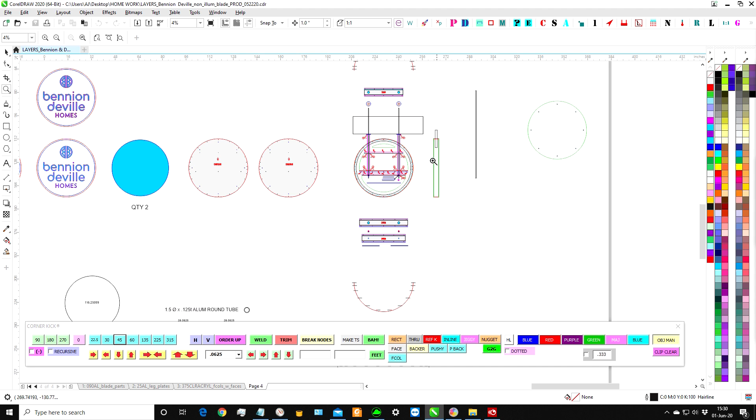All right, this one's for how to put together the blade sign for Bennion Deville. It's going to be kind of big, but it's kind of our usual. You'll have your notched top and bottom. You'll go ahead and fold this up here. That'll be your seam, so you can weld that.

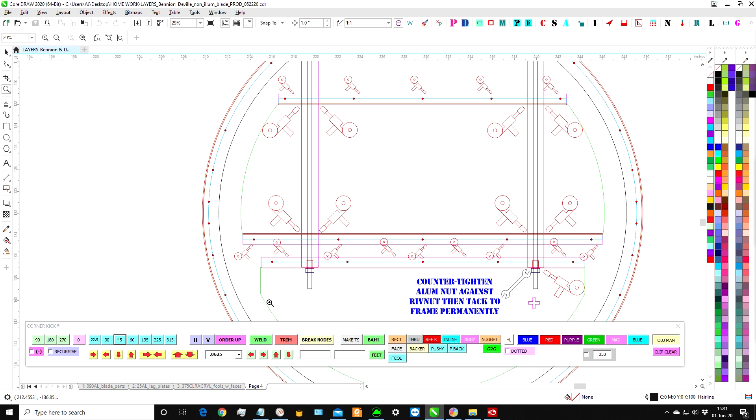You have a side A and a side B. So the jig will be side A is over here, side B is on this side. And you'll go ahead and just put it together that way. Put the seam, weld it together. Both sides will face forward, so both A's will be on this side, both B's will be on this side.

You go ahead and put these guys in, so you'll have the green parts are jig. You go ahead and click those on and just weld these bars in, and those will give you holes in order to put the legs through. So you go ahead and you have the top piece here, tack it all along there. Put this bottom piece in there, tack it all along there.

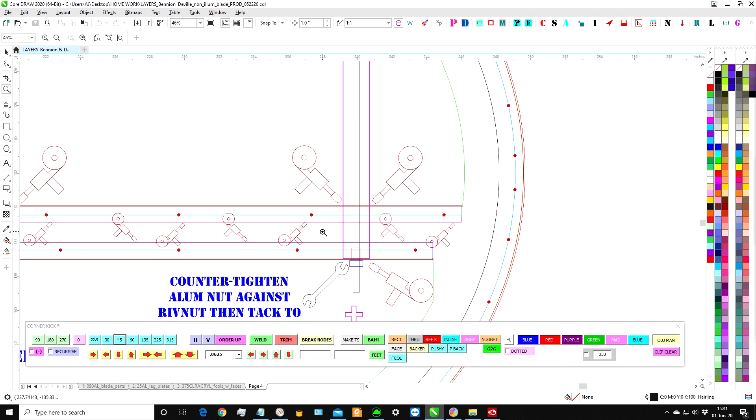I encourage you to put the riv nuts in first. You're going to have 3/8 riv nuts right here. That's the bottom piece. Your bottom top piece will be bigger. So once you have all of this welded together, put the outer perimeter on, weld that, weld all these. Then go ahead and slide your tubes in your legs.

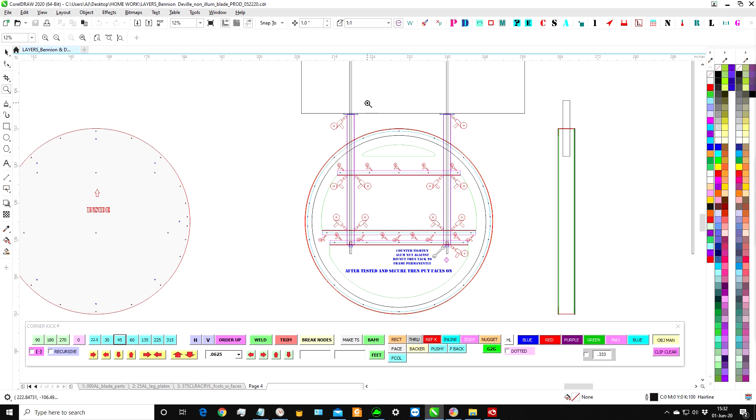That'll be 1.5 round. If you don't have it, go ahead and order it up. But I think that should be on the top rack there. So that's your distance there, your cut to length, and then you'll have 2 little 1/4-inch feet that you'll slide down. It'll be nested in 1/16. Go ahead and burn that all the way around.

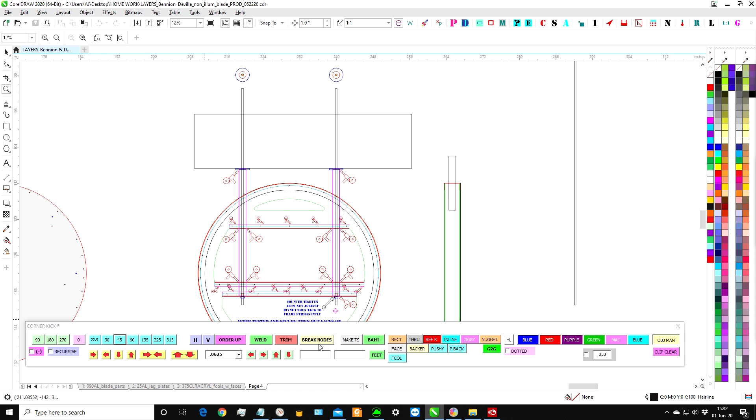There will not be a nut on top. So you're just going to slide the all thread through. I'm going to order that up. It's going to be 4-foot all thread. We're going to put it all the way through. So before you put the face on, get everything welded together, slide the tubes in.

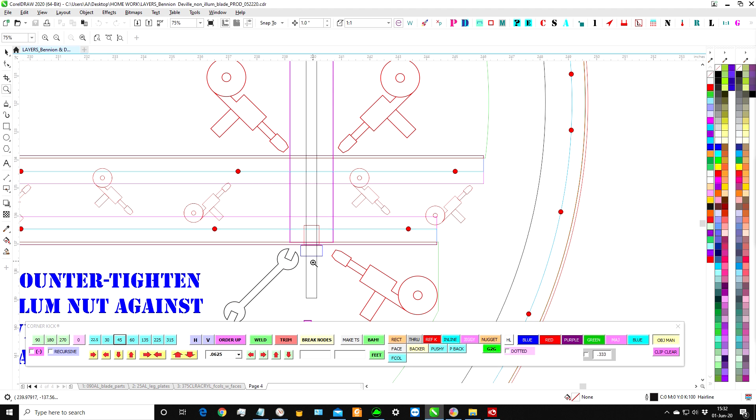You're going to go ahead and burn the tube here, and you're going to burn the tube there. And then you're going to make sure that the tube butts up against the bottom here, so that way the riv nut is going up into the tube there. So once you have that, go ahead and slide your all thread through, and then go ahead and counter tighten an aluminum nut onto this, and make sure it's nice and counter tightened so this won't twist.

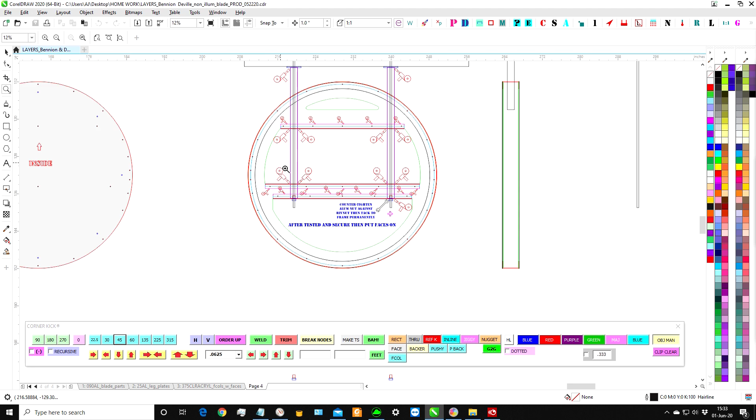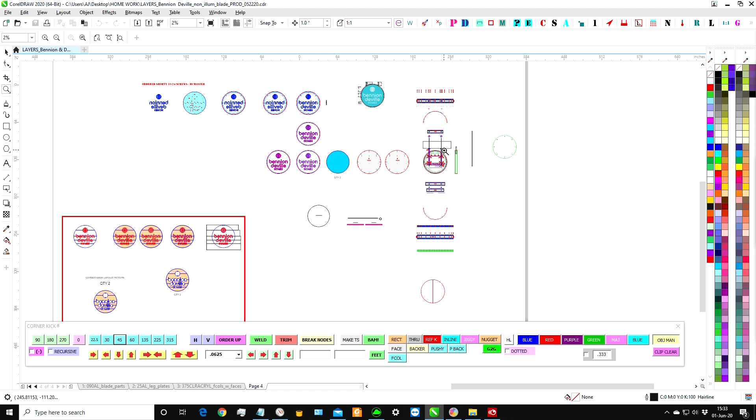So make sure you have this all Lord's-ed up good. It'll touch along here, so that'll be Lord's-ed. Just make sure you just get it on there good. So once that's all done, it was decided that we are going to use 3/8 and 3/8. So you will have 3/8 cut out letters, and these are number 10s. So the number 10s are clearance from the back.

So I ordered up those. Actually, yeah, those should have already gotten there. I think you received those screws already. Anyway, so that's for these guys. The heads will be countersunk to the back, so you'll go ahead and assemble that.

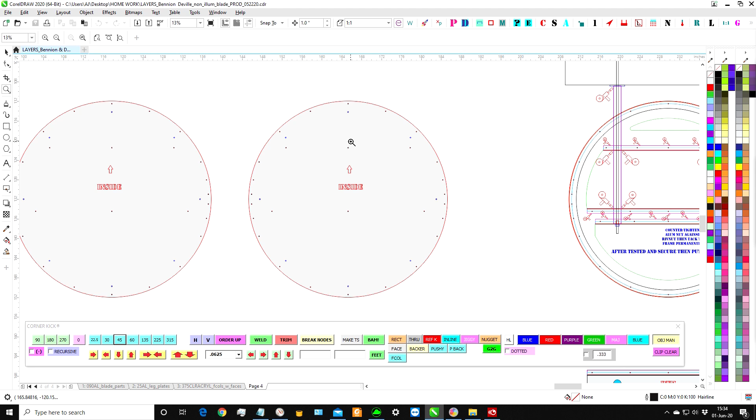Once it's assembled, then you will use the studs around the perimeter to go ahead and silicone and double stick tape on that finished product, and you can use these holes for alignment. That way you know it's all nice and square and straight.

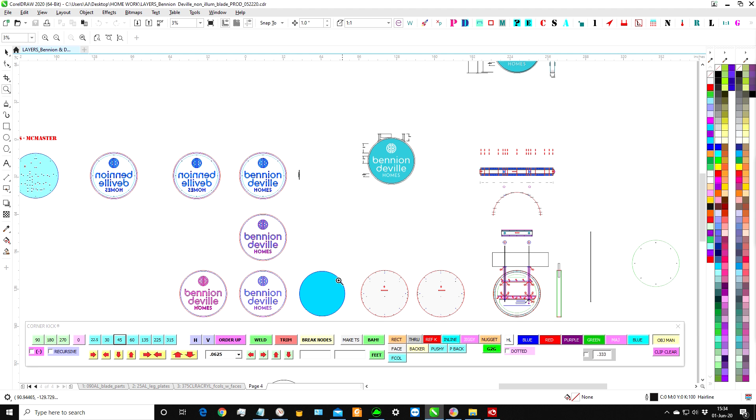Right, so the 3/8 acrylic backer will get painted the green. These letters will get painted. You can assemble it from the back, and then once that's all assembled, put in the studs, and then you'll be able to attach the faces to the blade sign.

Disregard these things. Those were decided to not be used, so it's just going to be the legs. But otherwise, it should be fairly straightforward. Before, they weren't quite sure how they wanted to go, so ignore all that. That was for a Gerber mask. So anyway, pretty straightforward. Again, if you have any questions, hit me up.